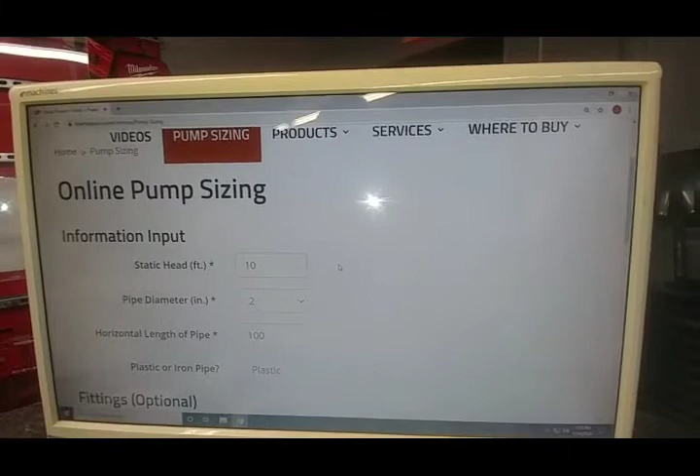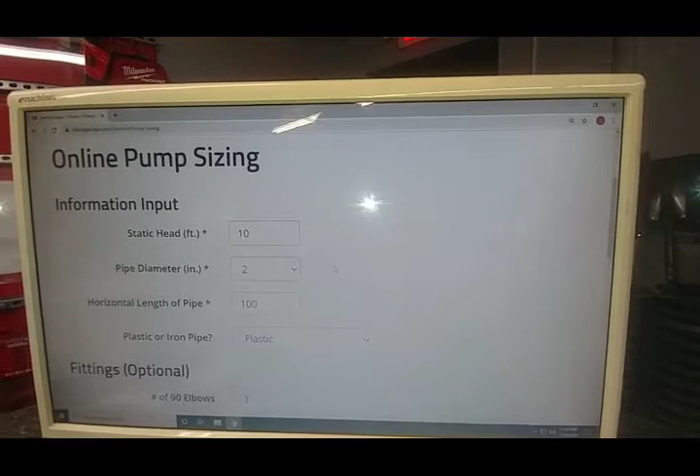Okay. Now we're doing a sewage pump in this particular example, so the pipe diameter on this one's going to be 2 inches because it's going to be one of the LE models. Horizontal length of pipe, we're going to do 100 feet, just a generic 100 feet. Actually, let's do 200 feet. Why not? Let's change that.

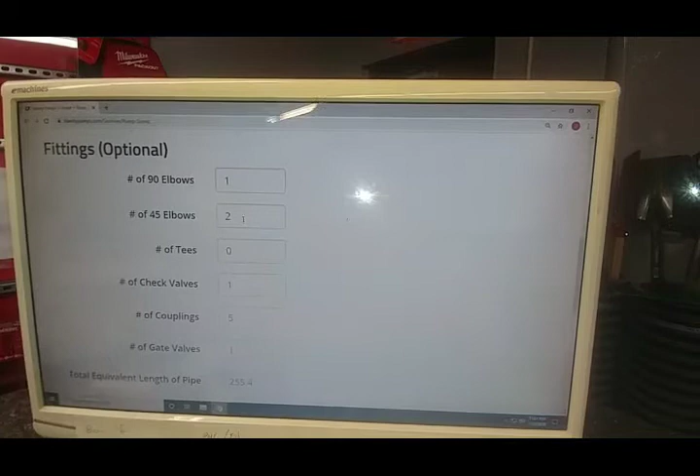Plastic pipe is pretty much always going to be plastic. Number of elbows, we're going to have at least one 90. Number of 45s, we're going to go ahead and say we'll have 2 of those. And I was taught this math, and it's not really that complicated, but as far as total dynamic head and all that, 90s count as 2 feet, 45s count as 1 foot.

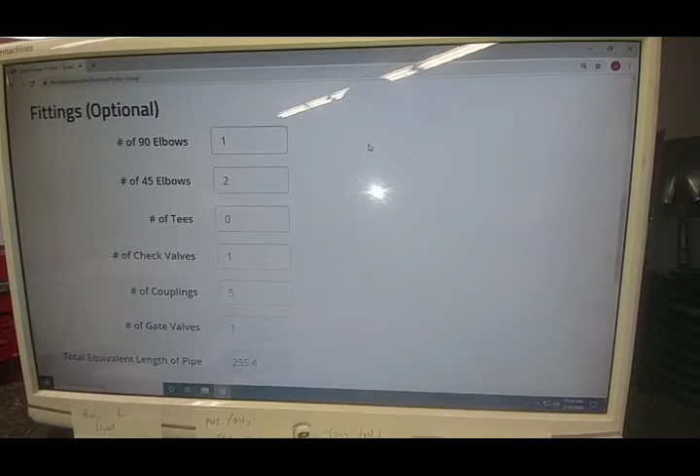T's I think count as 4 feet if I remember right. Check valves are usually counted as 1 foot. Couplings are counted as 1 foot. And gate or ball valves, I don't know why they call it gate valves here, but ball valves apply there too. They typically count as 1 foot. Anything that can slow the flow down and cause friction loss has to be accounted for here.

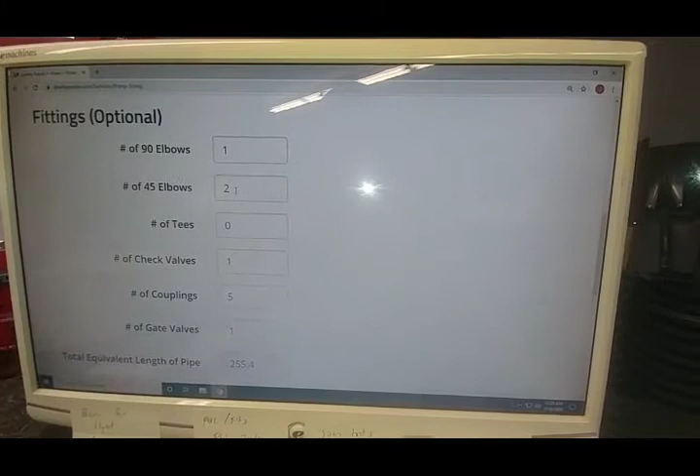So in this particular example, I've got the one 90 that I think we're probably going to have, and two 45s just in case we've got to snake around something. You're going to have a check valve, and we actually need to change this too. So we're going to have 10 couplings minimum.

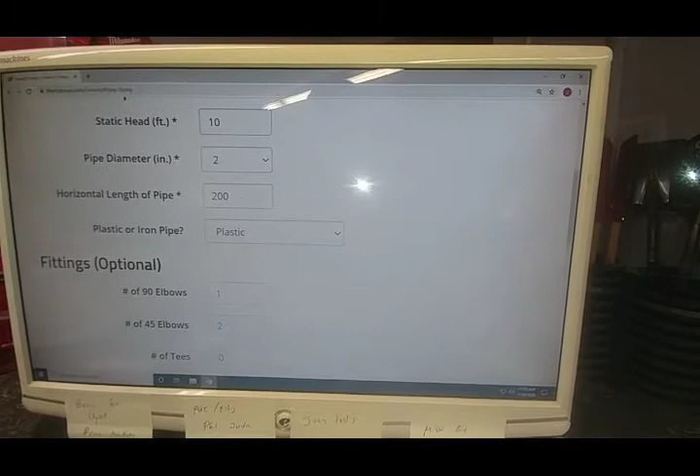It's important to remember that when you're doing this math on this website, for that horizontal length of pipe, even if you're using bell end pipe, those couplings on that bell end pipe still count as couplings for this calculation. So 200 foot, you're going to have 10 pieces of 20 foot long, so you're going to have 10 couplings. And number of gate valves, 1. So total equivalent length of pipe in this scenario is 265.4 feet.

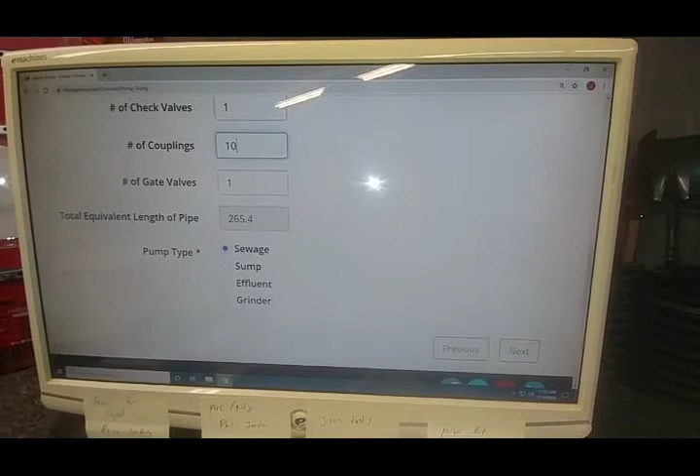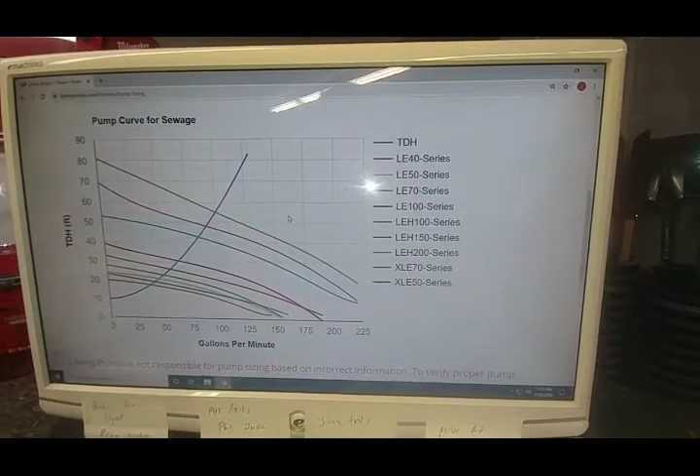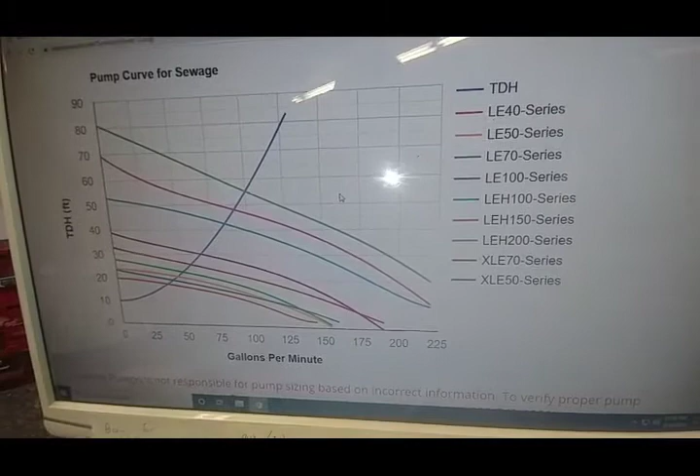Okay, so we're going to click next, and I set that to sewage pumps, and look at that, it's going to show you all your pump curves for all the different models they make. Pretty doggone handy. Now let's see, so the LE50, that's that orange bar right there.

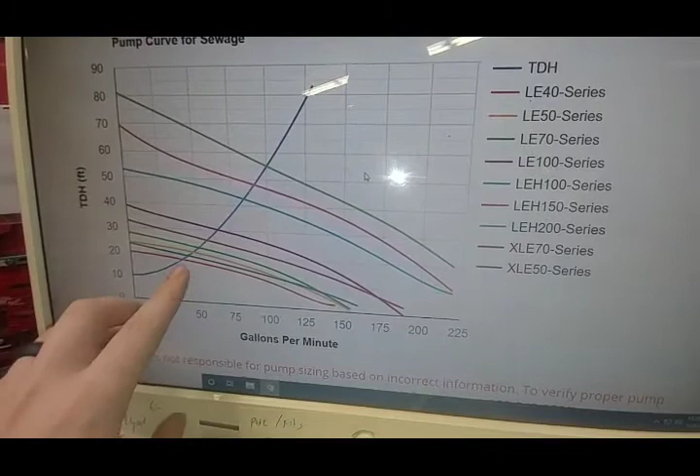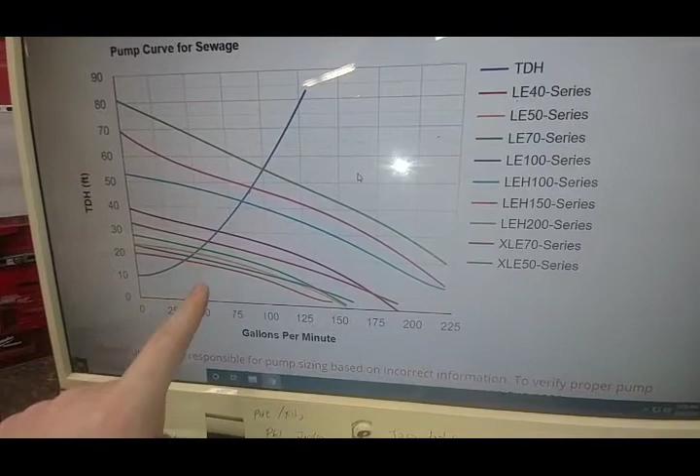So you've got to look at this blue mark here, that's your total dynamic head. So wherever that intersects that pump curve, that's how many gallons per minute you can get from that pump. So in this particular example, it looks like you're going to get about 50 gallons per minute out of a half horse pump.

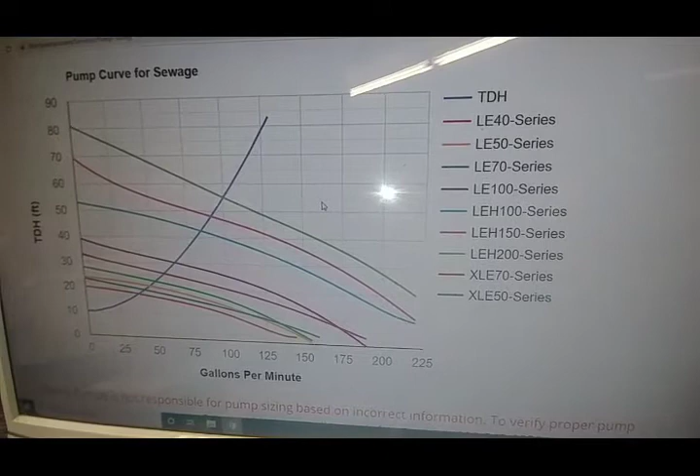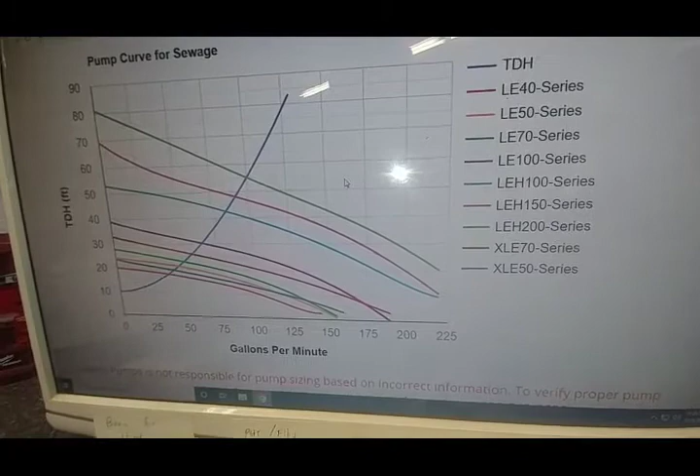So there you go. Is that too much pump? Is that not enough pump? Well, it depends. It depends on what the requirements are. In this particular example, let's see, the red is the 40 series. That's a 4/10. So the 4/10 is right there. In this particular example, a 4/10 would probably be sufficient.

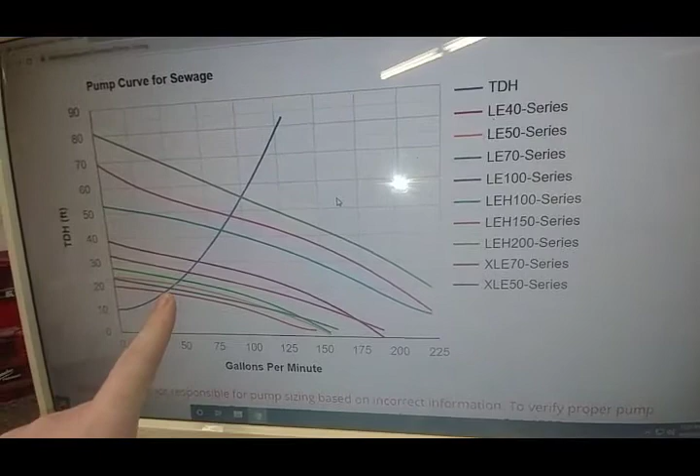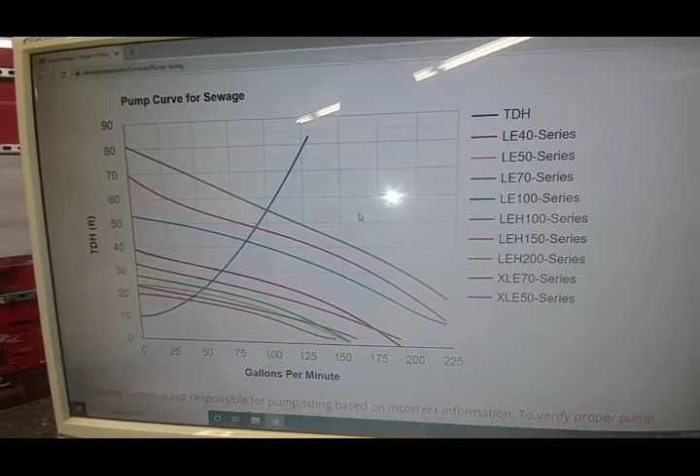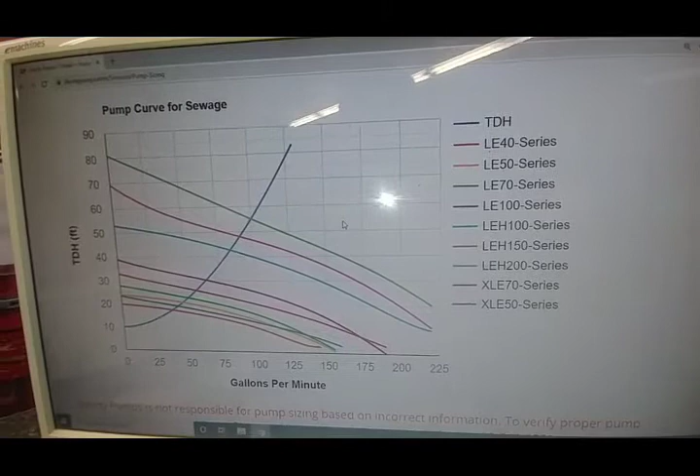It's going to vary from area to area, but typically, my understanding is about 15 gallons per minute is what is typically sufficient. But again, you need to let your contractor tell you what GPM he needs, because that's going to be determined by the health department and local codes. But in this particular example, a 4/10 would probably be good enough.

But let's say we go nuts and we put a 1 horse in there. So that would be way up here.

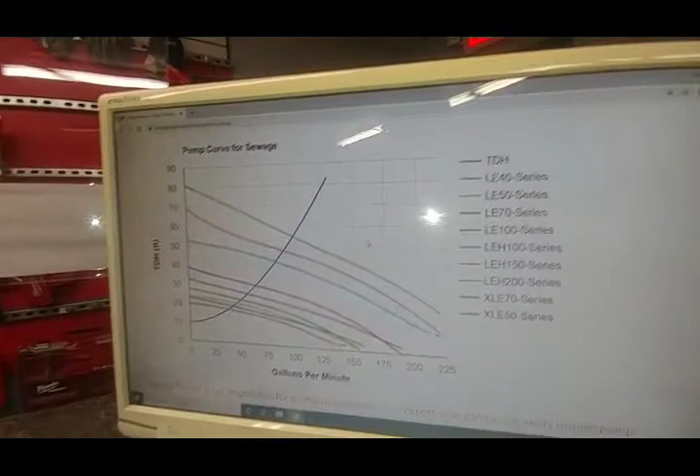That I would call about 60 gallons per minute. That's probably way too much, and I'm going to get into why.

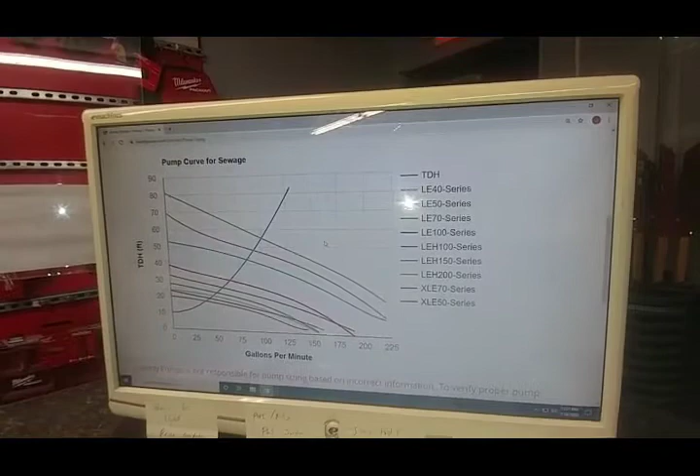When you're sizing one of these pumps, it's very important to size it correctly, because if you put too big of a pump in the wrong application, what happens is the pump will short cycle.

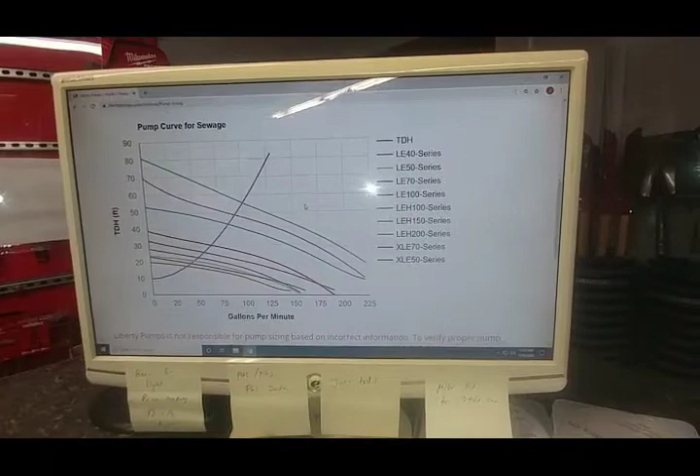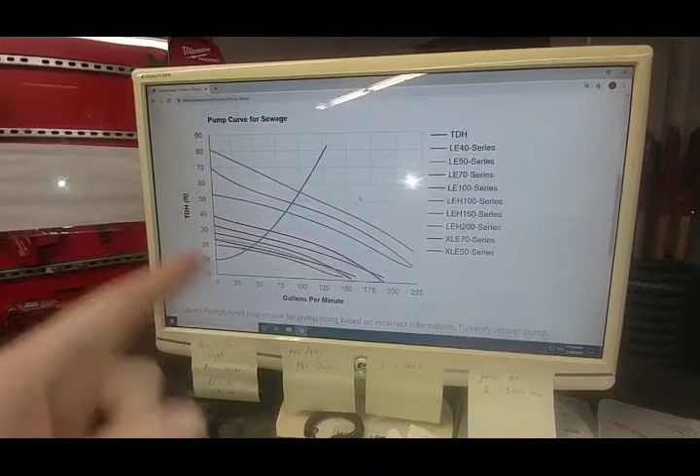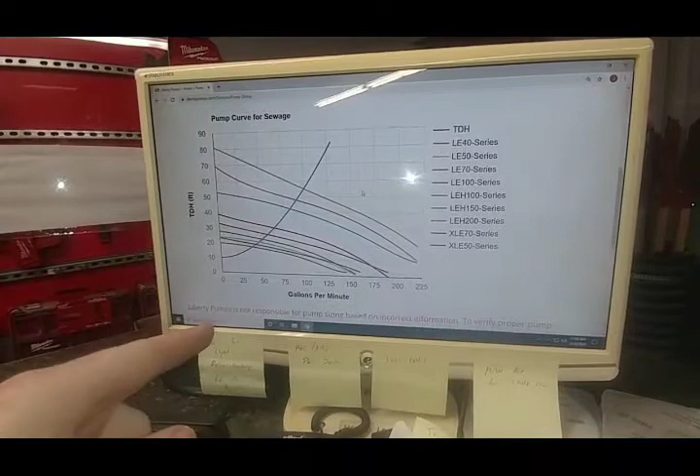Inside that pump motor, it's a sealed unit, oiled for life. When that pump motor kicks on, that oil circulates through the pump. But if the pump goes and cuts right back off, because it can move 100 gallons a minute and it's only got 20 or 30 gallons to pump, and it goes and cuts back off, then fills back up and cuts back off again, that oil doesn't have time to circulate through the motor, which causes it to wear.

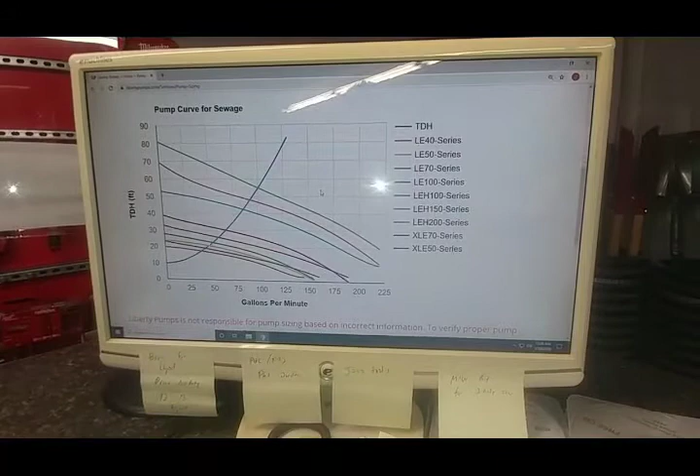You don't want pumps to short cycle. Very important they don't do that. That dramatically, very dramatically shortens the life of the pump.

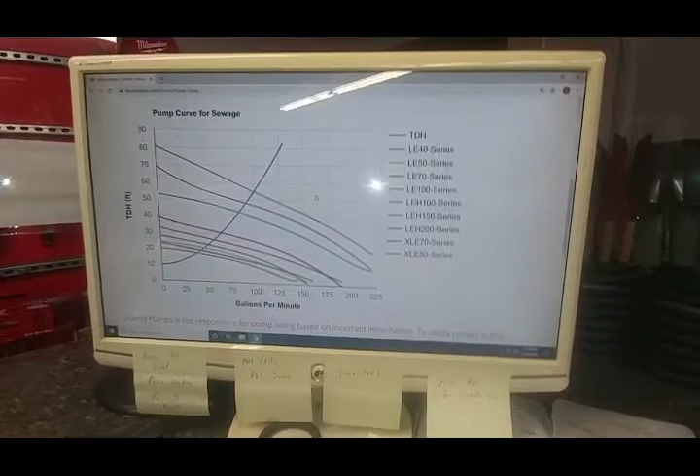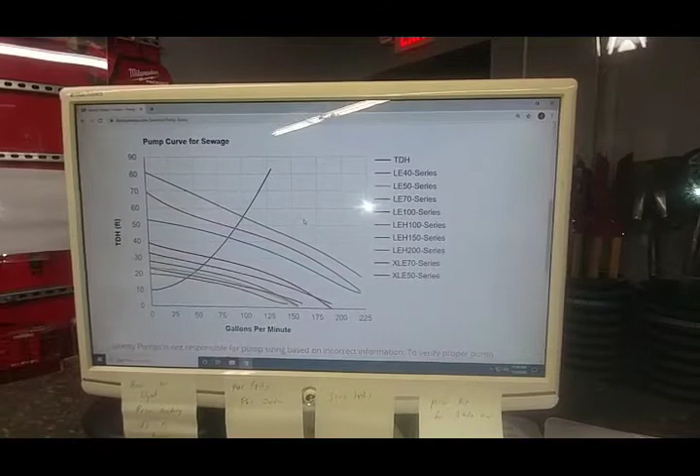But Liberty keeps all kinds of stuff. You've got your effluent pumps, sump pumps, sewage pumps, grinder pumps, packages, you've got all kinds of neat stuff. Like the 370 sewage packages we keep, they've got the 44 gallon basins, or the ProVore package we keep, it's the 380. It's a short squat one.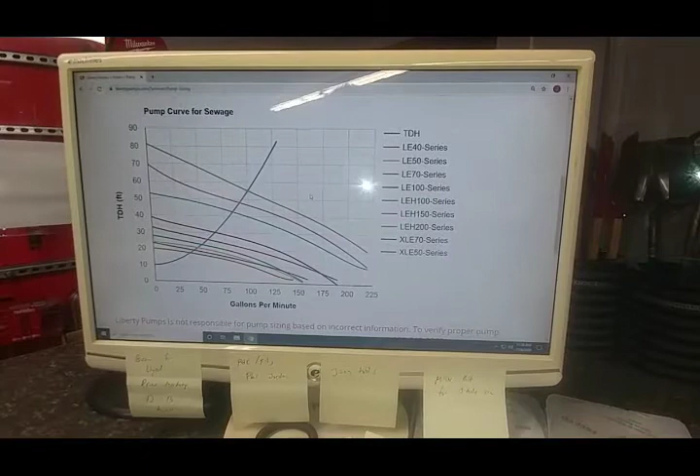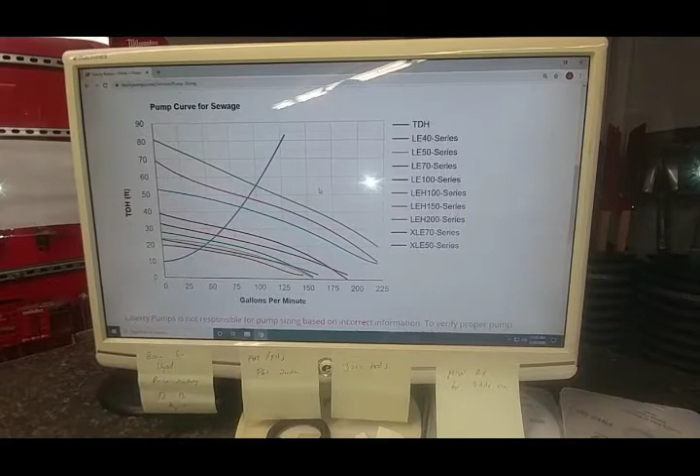They make a pump for just about every situation that involves black or gray water. They've got condensate pumps, this is the LS-20 I think it is, or LSC-20, I forget. They make a very good condensate pump.

They've got crawl space pumps that have little basins built in, the CSPs, CSP-257 and -237 I think. Pretty handy.

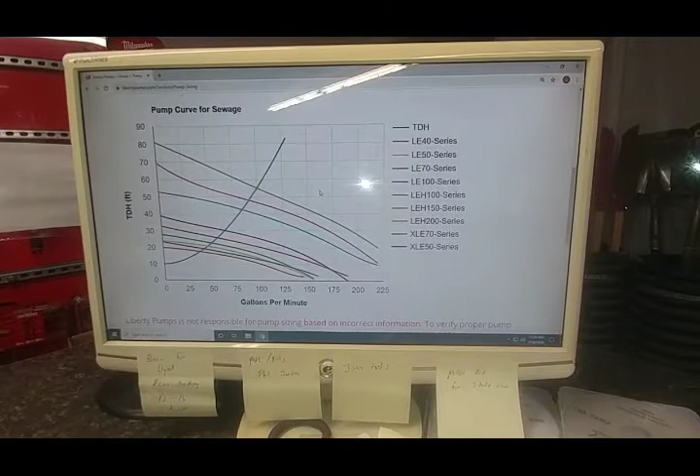Transfer pumps, trash pumps, but they don't make an actual high horsepower trash pump. That's about the only pump they don't make that I know of.

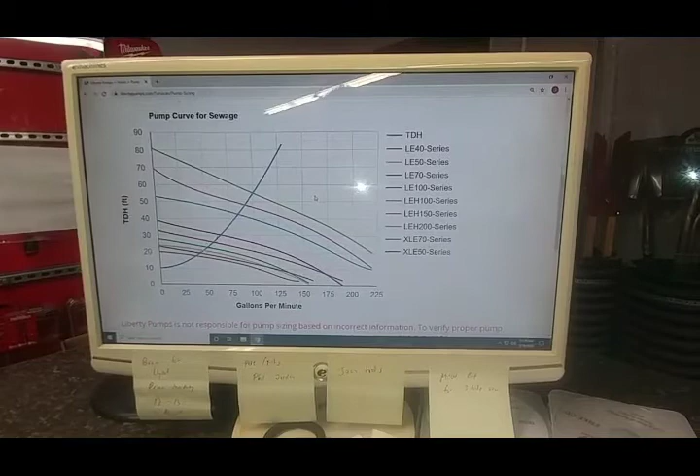They've got explosion proof pumps, which if you're in an environment dealing with fuel oil, or around dangerous chemicals, that's what you would use in those situations.

Yeah, they got a pump for just about every application.

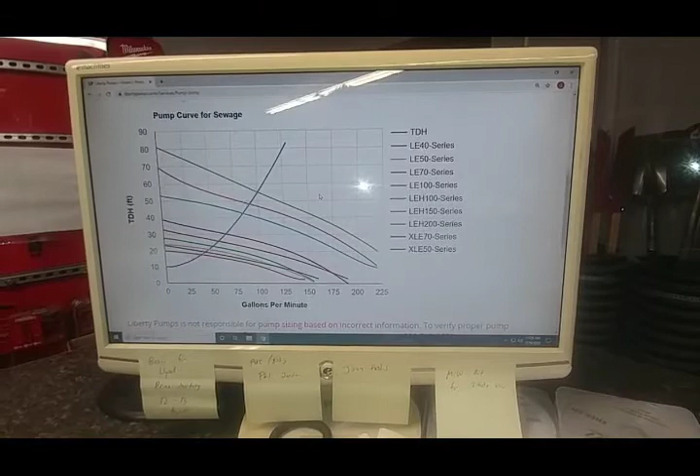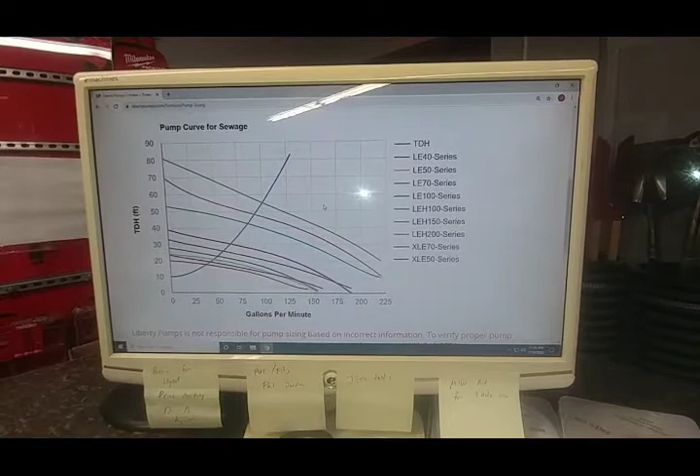And their website is excellent. It's one of the best manufacturer websites I've ever seen. It's very, very easy to navigate. I highly encourage you to browse it when you have some free time. Check out all the different models they make. Do item inquiries in our system to see what we keep.

We keep a very, very good variety of what they have, and also, Snyder's not that far, and they keep a whole bunch of stuff too, so we can always pick up what we need from them if we don't have it. They also make a lot of commercial pumps.

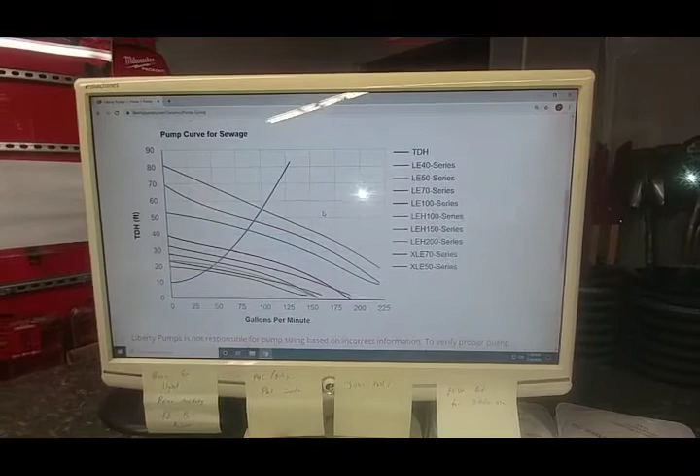You can do custom basins. You can do duplex systems. You can have alarm packages built in with them.

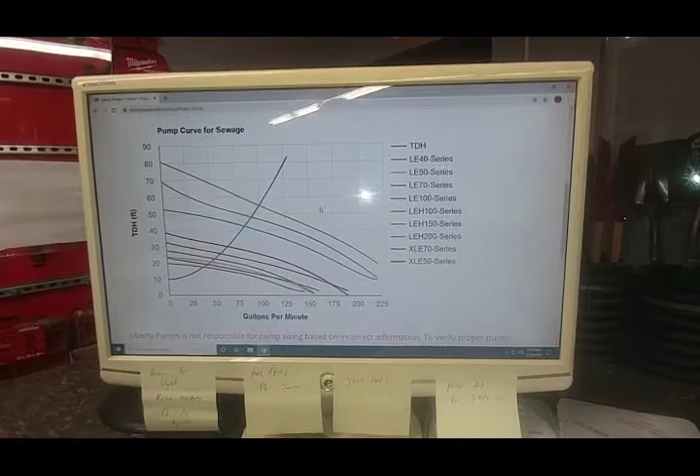Which commercial, especially if you're doing basins like that, the process is a little different. You'll have to email Snyder, and they'll send it off to Liberty, to their engineers, and they'll actually engineer it and generate a quote and email it back to you.

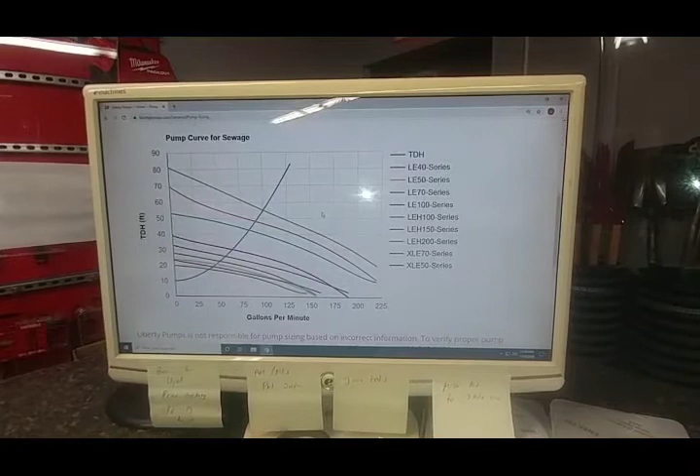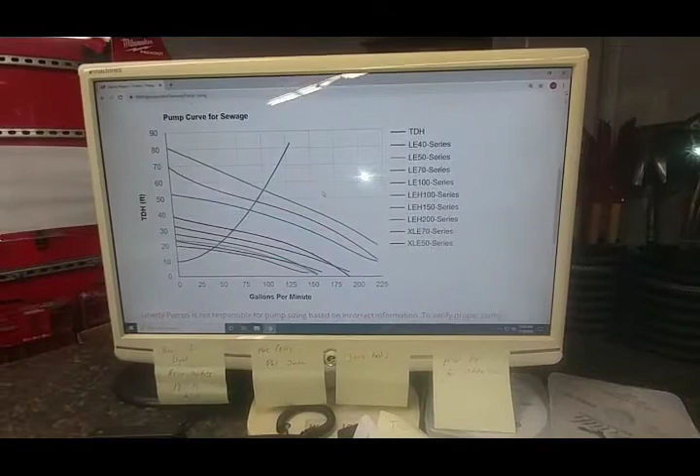So it's a little more involved, but with those types of situations, you still need to know all that information I just put into this chart, but you also need to know voltage and whether it's a duplex or simplex system.

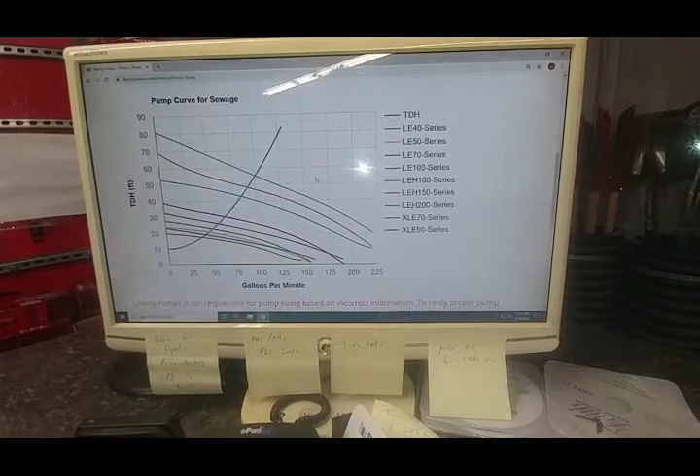That's about it. Just make sure you got all your facts straight. Make sure you check your math, and if you're not sure, you can always call Snyder and give them the specs and say, 'Hey, I need a pump that can do this. What do you got?' They're pretty good about helping with that.

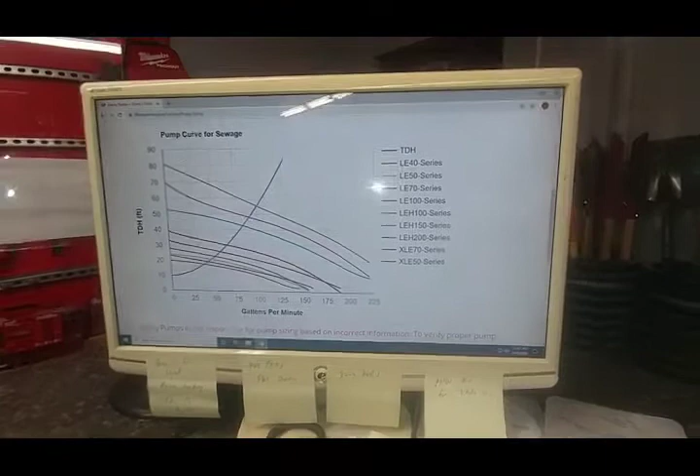They got a couple guys over there that specialize in that. And if they can't get you an answer, they'll refer you to Liberty, and they will have the answer.

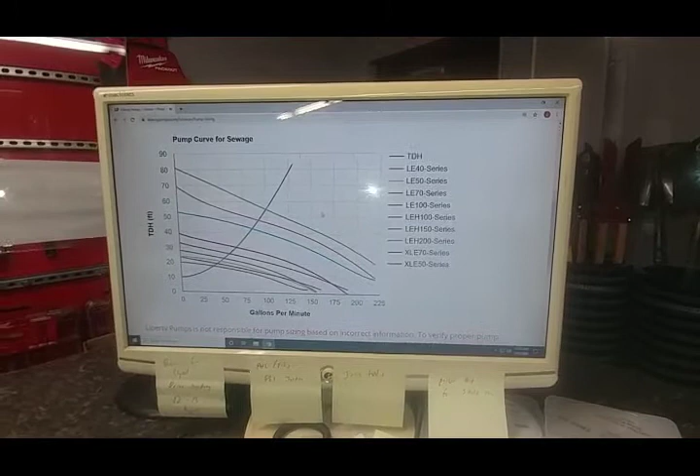But yeah, that's it. Like I said, I wanted to keep this under 10 minutes. Can't really think of anything else I want to cover on it. Just definitely check out their website.

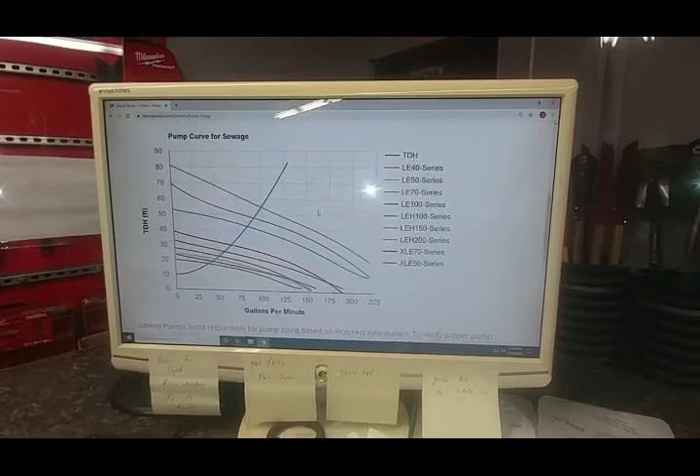It's very, very, very well done. I wish all the manufacturers had websites like this.